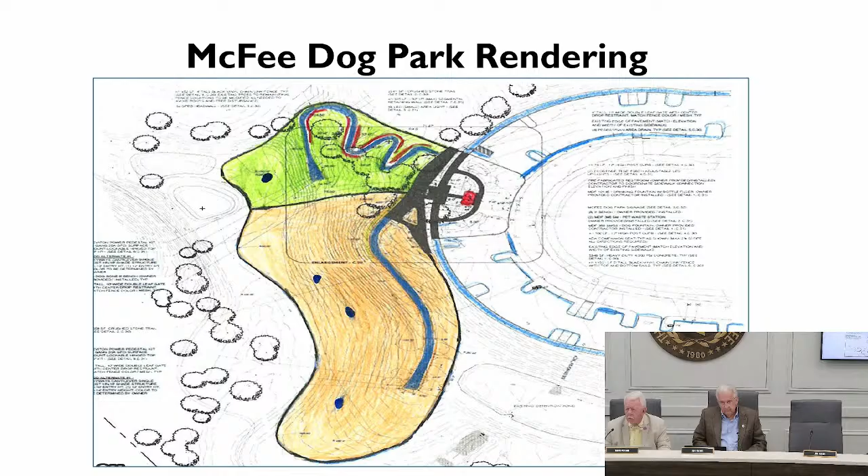This project before you is a long-awaited project. It's the third grant project of four awarded for the town through TDEC's local Park and Recreation Fund. The exact location is the west side of McFee Park, between our newest parking lot area and the adaptive trail. The dog park is relatively simple in design: it's fencing, a little pathway work, and some grass.

As you can see, the park is broken up into a small dog and a large dog park with ADA-rated pathways within each. These paths will be made of an aggregate material described as crushed stone with a hardening material that makes the stone solid. There's quite a bit of hard surface in the plan - the dark area above the blue line is designed as concrete, but it will actually be this aggregate material, which will save a lot of expense.

The reason for the separate parks is to prevent potential conflicts and injuries between dogs. Due to its hilly location, the small dog park has some retaining walls, shown in the red lines above, and a more winding path to meet ADA requirements. The large park has a longer path due to its size, leading to a shade structure and some benches at the bottom.

Coming from the parking lot, we'll have a two-stall restroom facility designed much like the others in the park - that's a separate project later in the fall. As people walk up with their pets, there will be a transition area so the big dogs and small dogs won't mix. Once past the transition, dogs have free rein to wander and play. Each park has fun structures for the dogs, located in the small dog park so those dogs will love that.

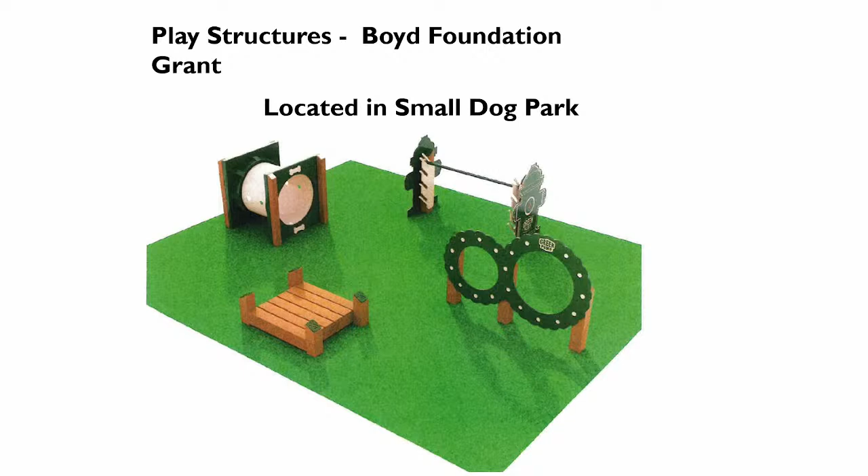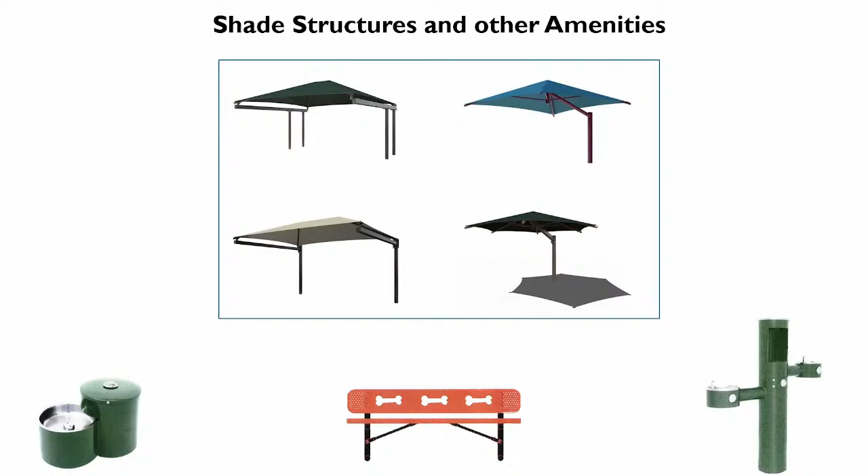A similar structure is located in the large dog park for the bigger dogs. Other amenities include benches, a few shade structures, and both human and pet drinking fountains. The entire dog park property will be surrounded with black chain link fence, for the safety of the animals and people, and to keep everyone safe and separate.

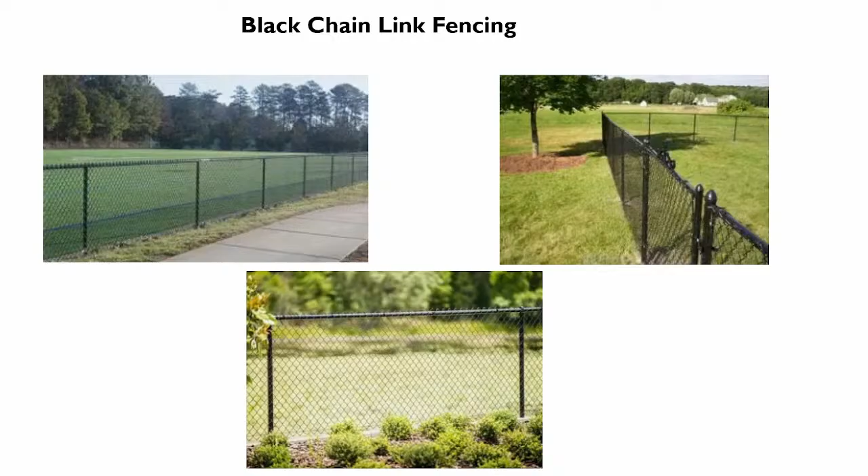Similar to other dog parks, we'll post a dog park code of conduct and other important information at the entrances. This is a non-lighted complex, so evening hours will likely end at early dusk. Our landscape architect estimates this project could take between 4 and 6 months from start to finish due to all the excavation required.

We're planning to go out to bid in early September, perhaps sooner once we hear back from TDEC - they have the plans now and are reviewing them to make sure they are ADA compliant. This puts potential opening of the dog park in late spring, early summer of 2026.

Are there any specific questions regarding the dog park? I have two - first, are the restrooms inside the fenced-in area, or outside? No, they'll be right outside the new parking lot as you enter the area - it's the red area right there, where the little dot is. That'll be the restroom.

And my second question - there's supposed to be a 16-foot by 16-foot shade area at the end of each, the small dog and large dog park? It'll be at the end of the large dog park. The smaller dog park is very shaded, so we don't have a shade structure there - there's already so many trees. Got it, thank you.

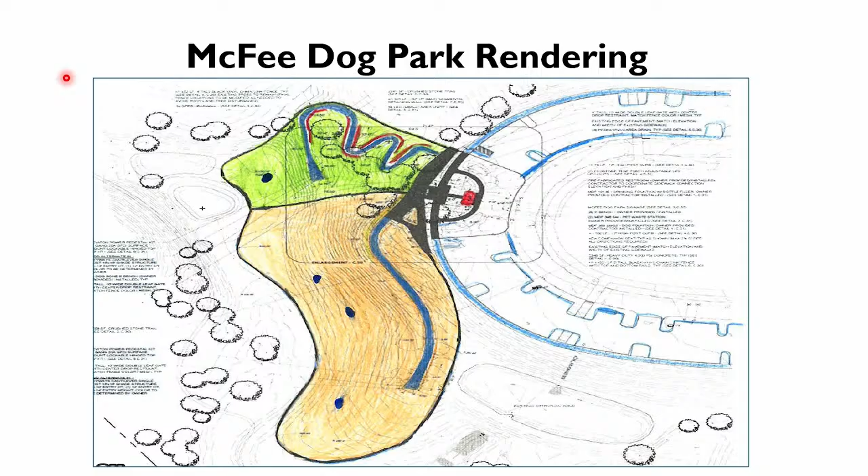I'm going to make a motion to approve as presented.

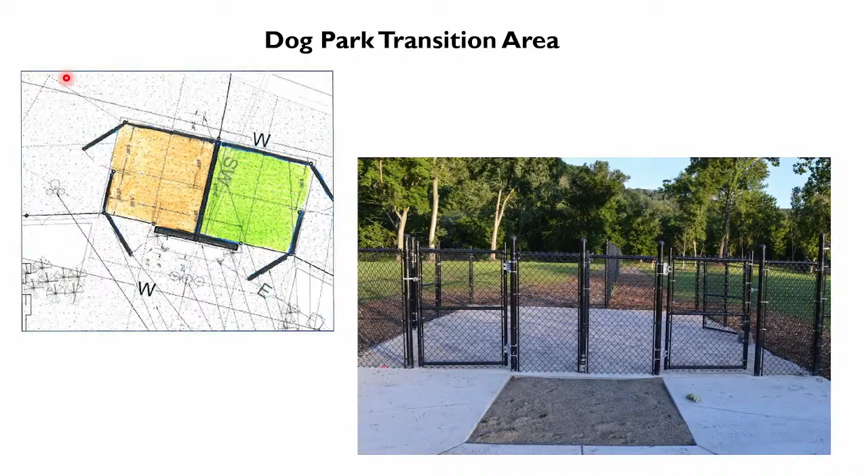All right, motion passes. Do you want to tell us the results? Yeah, the motion passed 6-0. Thank you.

This is the reconstruction of Virtue Road as well as a portion of Boyd Station Road. It begins at a point at the southern end of Virtue Phase 1 improvements that were completed back in 2022. From there, it extends down to Boyd Station Road and then to the west to Willow Cove Way. The project addresses several safety issues we've known about for years, mostly having to do with limited sight distance. It also flattens the curve where Virtue Road ends at Boyd Station.

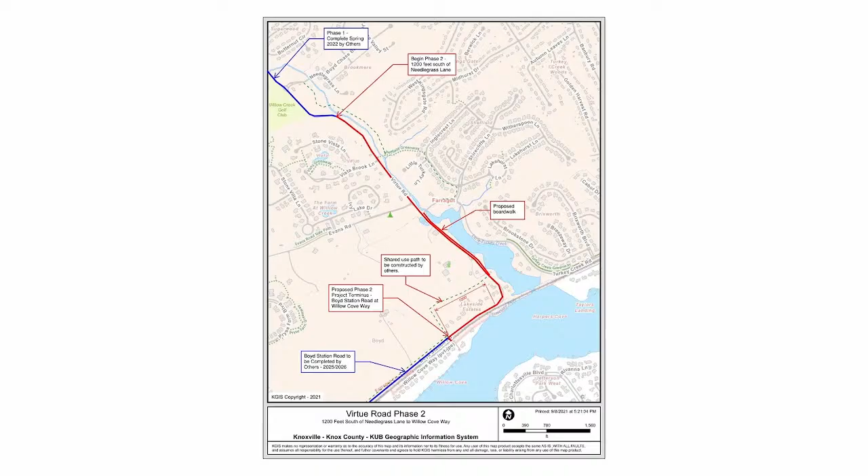One interesting element of this project is about 1,300 feet of boardwalk on the eastern side of Virtue Road, extending from Turkey Creek Road to the south. It will link to a greenway coming out of the Grove at Boyd Station subdivision.

Jason Elliott is with us tonight from LDA Engineering. He's our consultant. If you have any questions, I'm sure he'll be able to answer.

Motion to approve. Second. Any citizens signed up to speak? No, sir.

State your name and your address. Jason Elliott, 2970 Sagegrass Drive, Louisville. And I'm with LDA Engineering. We're doing the design work on this project.

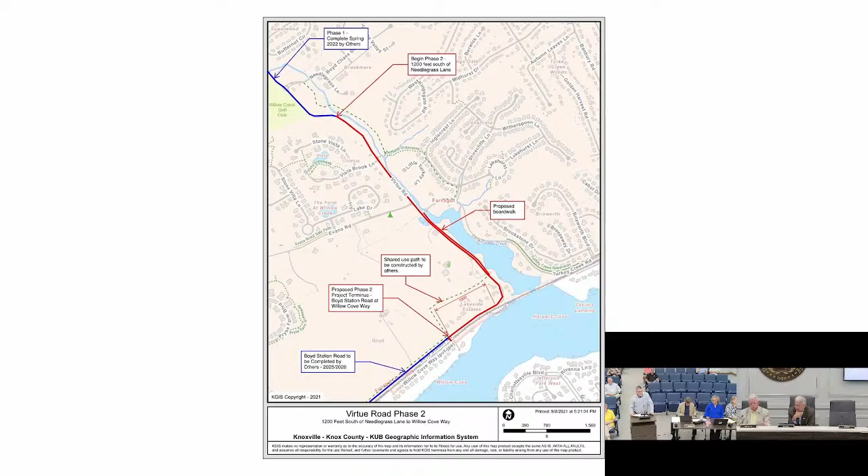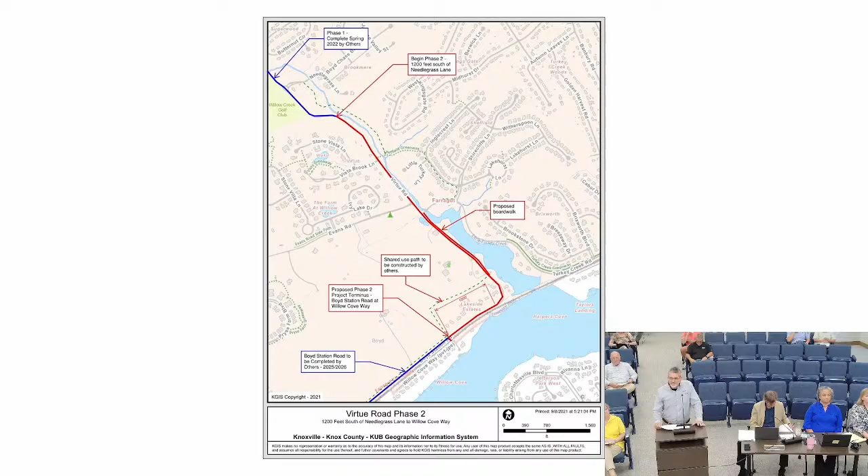Mark, I may ask you to jump around a little bit. Rather than going through the entire set of plans, I'm going to just highlight some examples of where we're improving safety, where we're adding connectivity for peds and bikes, because this area is in a gap of the Farragut Greenway system. So we're attempting to fill that gap to some degree. I just wanted to give you all a few examples of where we're doing that along the project.

I'm also going to talk briefly at the end about traffic calming, which has been brought up by several residents out here. So where was that picture? Can you go back to the photos?

So this is a boardwalk we just finished building in Alcoa. It's not very long and not very tall like the one we're going to have here along Virtue, but it's the same construction. It's all timber except for the stainless steel tension cables which make up the railing. It's really attractive, especially in person. I don't think the photos do it justice, but we've actually done several of these in Blount County, and I think they're a nice addition, a nice aesthetic.

All right, so let's talk about safety a little bit. I'm going to try to limit this to 10 minutes. If I go way too long, let me know. If you go to the first plan sheet, Mark, sheet 4, yeah.

So for improving safety on a roadway corridor, there are several ways to do that. For instance, on this project we are widening the lanes slightly from about existing 10-foot width to 11-foot lanes, which is about what TDOT likes to see, 11-foot minimum. We're adding curb and gutter on both sides of the road. That creates a somewhat physical obstruction to the edge of the road, sort of like rumble strips do on the freeway. If you hit it, you're going to wake up. So those are kind of minor ways to increase safety.

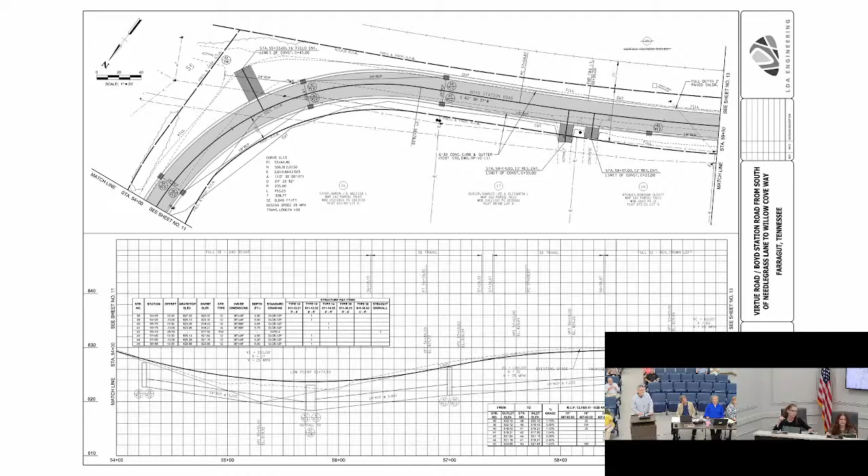And then if you go back up to sheet 10. Jason, before you move on, my concern is we have so much technology going on, it's blowing my mind. The people that live on that corner, the Stouts, their driveway, is their sight distance going to be improved with this? Because my feeling is people will be able to take this turn a little bit faster than they can right now. And so them pulling out of their driveway, they shouldn't have to gun it, so are they going to have enough sight distance to see?

So one thing that'll help is we're chopping that hill down, which is their front yard, basically their lawn. That's going to be cut down some to create a ditch on the edge of the road. So they should be able to see pretty well that way, until it really starts curving.

Now in the other direction to the north, that was more of a vertical issue where there's a hump in the road. So you're not able to see - this is the set of plans that was the latest set that we submitted to TDOT. Since then, we've cut that high point down about 18 inches, and that greatly improved the sight distance for them coming out of their driveway, turning left. So it's not shown here, but it has been addressed.

Now, I don't know if you've spoken to them, I know they've been involved in the process. I assume most of the turns they make out of their driveway are turning left. That's what they told me at the public meeting. Okay, yes.

When we get these plans to a final stage, we can send them so you could see that change. All right, Mark, if you'll go back up to, should just be one more sheet, I think.

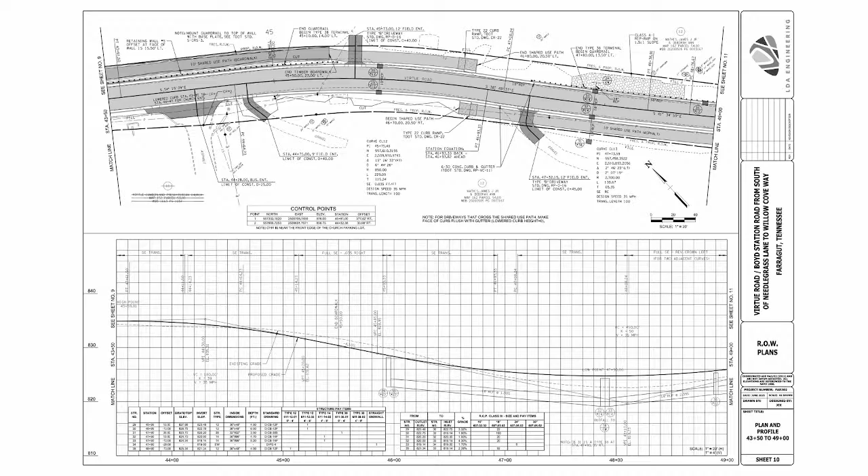There is one other vertical adjustment that I want to show you, and that's just north of Evans Road. So you'll need to go to sheet 7 for that one. Okay, station 28 to 29, to the left a little, Mark. So we've been made aware that turning left out of Evans onto northbound Virtue, you cannot see, again, because of a hump in the road.

What we're going to do with that hump, we're going to cut it down about 2 feet, just like the other one, and that's shown in the profile window. And that's going to increase the sight distance there about 200 feet. So that should not be a problem anymore.

We're also cutting back some of the vegetation on that corner adjacent to the Slayton property. So that's going to open up that whole intersection, and it should be a lot better situation than what's there now for vehicles turning left out of Evans.

Suggestion, if you say cut back, that's something that constantly needs to be trimmed as it stands right now. So I hope that there's more than just cutting it back, I hope it's pulling it up. They'll be gone, okay, thank you. Yes, sir, because we're having to cut a slope back, so we'll have to clear all those trees before we do that.

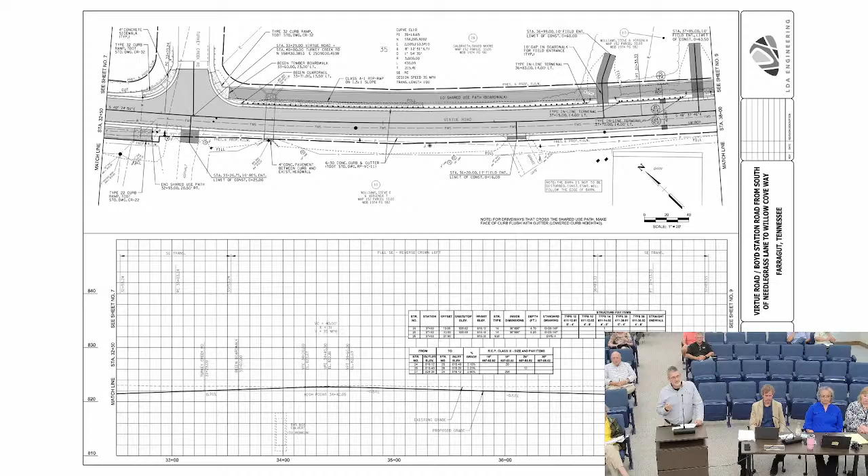The next part I wanted to cover was the greenway portion and how bikes and pedestrians will be able to use this corridor now, because currently there's really nowhere for them to be on this road.

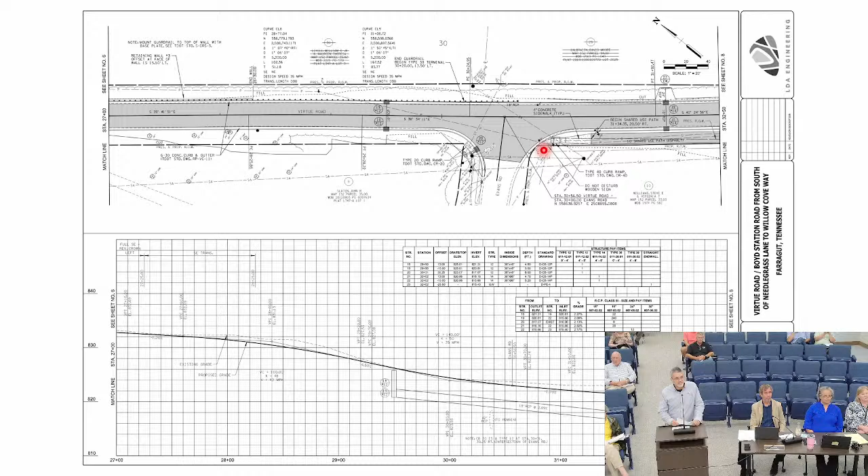I'm sure everybody knows about it. If you go back up one more, sheet 7. The greenway is going to start right there. It's going to tie into the existing sidewalk along Evans. There will be a crosswalk that goes across Evans at the stop sign.

In this area, we're using conventional concrete sidewalk at the intersection, and also just a regular asphalt greenway on the west side of Virtue. That's the shaded area you see below the road.

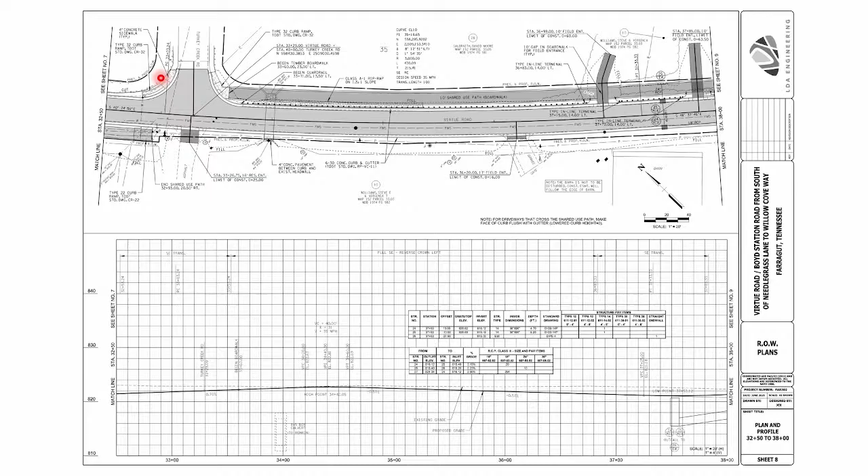You can jump to the next one. So it stays on that west side, stays asphalt until we get to Turkey Creek Road. We cross over on the north side of Turkey Creek, which, by the way, is going to be a three-way stop now, so that will not be considered a mid-block crossing. There will be a stop condition for all directions, which is more desirable when you're crossing pedestrians and bicycles.

Is that intersection meeting those warrants, seeing enough traffic especially from Turkey Creek Road, that they're not going to be blowing off the stop sign on Virtue Road? That's correct. That was one thing we were concerned about, that there wouldn't be enough volume coming off of Turkey Creek Road, but there was. We did meet the warrant for having a three-way stop there.

Well, you're going to have the road closed, so people won't be there until it's open again, correct? Do you mean during construction? Yes. The traffic control plan will have lane closures during construction, but we won't completely close the road unless something changes between now and when we start construction. We have a plan in place now where traffic will be allowed to stay on Virtue in one direction only.

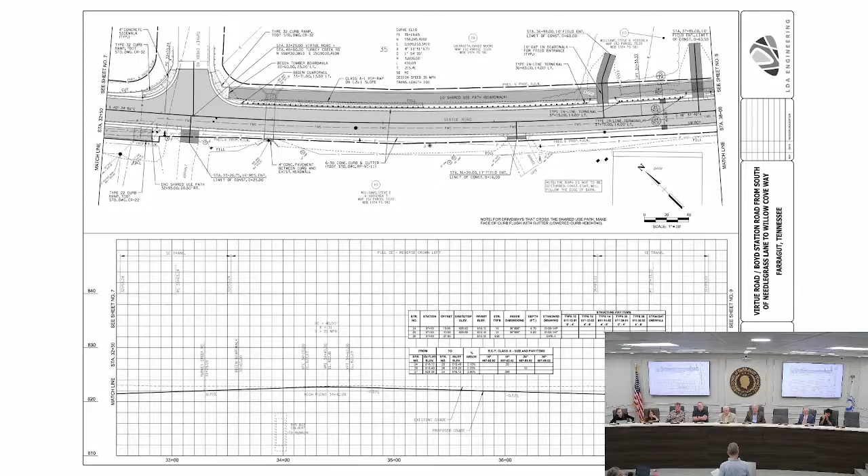Can I ask you, would it be wise, when you start construction and you start with all these lane closures, to at that point put in the three-way stop? Just so people—they're already slowing down, it's already confusing—putting in the three-way stop while everyone's getting used to that at the same time they're slowing down because of construction gives you the process of re-triggering everybody and realizing they need to know this is going to be a three-way stop and how it's going to work.

Yes, and that's exactly how it will happen. There are 3 phases of construction right now, the way we have it planned. This intersection is in phase 2, so we're going to start on the north end and make our way south, and Boyd Station will be the 3rd phase. So yes, while there are lane closures, that's when the signing and pavement marking will go in for the three-way stop. And I know I'm way past 10 minutes.

You're good. Okay, so the point I was making was the crossing there will be at a stop condition, and then the greenway picks up again, but this is where the boardwalk starts.

The reason we did a boardwalk was because the creek is right there. To do a fill section, we would have been impacting the vegetated zone along the creek—it would have been an environmental nightmare. So instead we're doing a timber boardwalk with posts anywhere between 8 and 25 feet, depending on what's happening, which minimizes the impact to that buffer area along the creek. It is more expensive, but it's definitely the best way to go, and it'll be the best end product for the users.

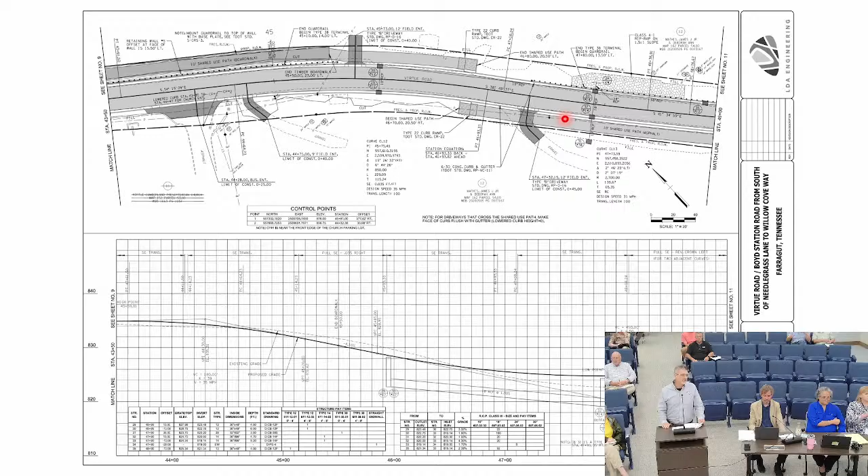Then it becomes an asphalt greenway again on the west side, and that will tie in—if you go one or two more—right there, to where the developer for the Grove is building a greenway parallel to Boyd Station Road, and that's where we're going to tie in to that greenway.

What about the flag lot portion, or the flagpole portion, coming from the Grove down to Virtue where the crossing's at? That's where they're building their greenway, on that flag lot portion. You can see it there—the property lines are only, I don't know, 50 feet apart, maybe 30 or 40. So as far as I know, that's all that's going on in that flag lot area.

I just wanted it on record for people on TV watching to know what we're talking about, okay? Okay.

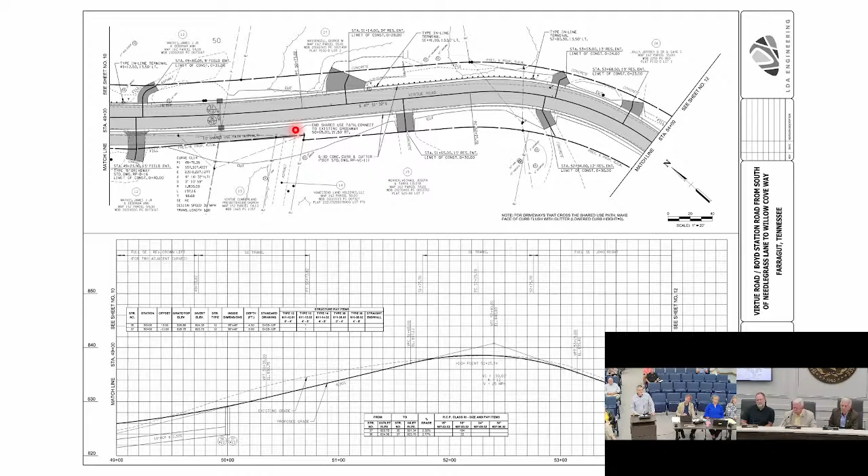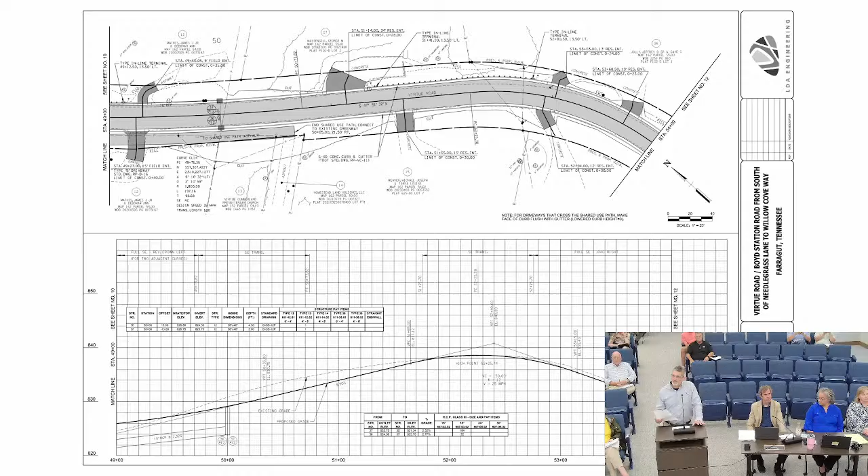All right, so that's the end of the Greenway discussion. The only other thing I wanted to touch on was traffic calming. Even in Phase 1, Virtue Road, speeding was something we heard over and over again. How do we get them to slow down out here? So on Phase 1, we did that roundabout at Needlegrass Lane.

On this one, we're doing probably the most effective traffic calming you can do, and that's making them stop halfway down. I don't think you can get any better than that. This roadway is classified not as an arterial, but a major collector, so you're very limited on the types of traffic calming you can use.

You can't use speed humps, you can't use little traffic islands in the middle like we did on... Grigsby Chapel, that's it. So there's roundabouts, there's stop conditions. We figured the intersection warranted a stop, so that would be a good way to slow people down right about halfway between Boyd Station and the northern end of this project.

So I think that worked. People will probably, at the crosswalk, naturally slow down looking to make sure nobody's there. I think that's going to be a speed deterrent as well. I hope so, because there will be signing for that crosswalk too. Even though it's not a mid-block, there will still be advanced signing.

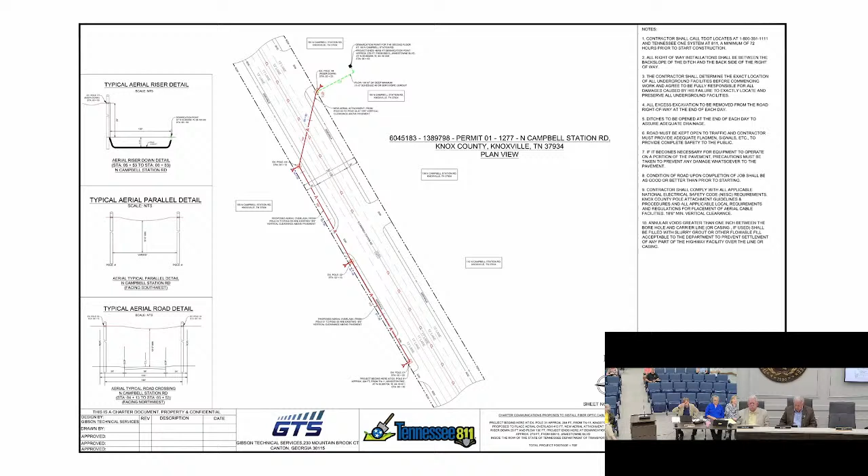The staff recommends approval of this fiber optic cable extension, subject to obtaining a right-of-way permit through the engineering department and coordinating the actual service connection with the property owner. Motion to approve the plan to extend the fiber optic cable subject to those conditions. Second. All right, do we have any citizens signed up to speak? No, sir. Do we have a representative present?

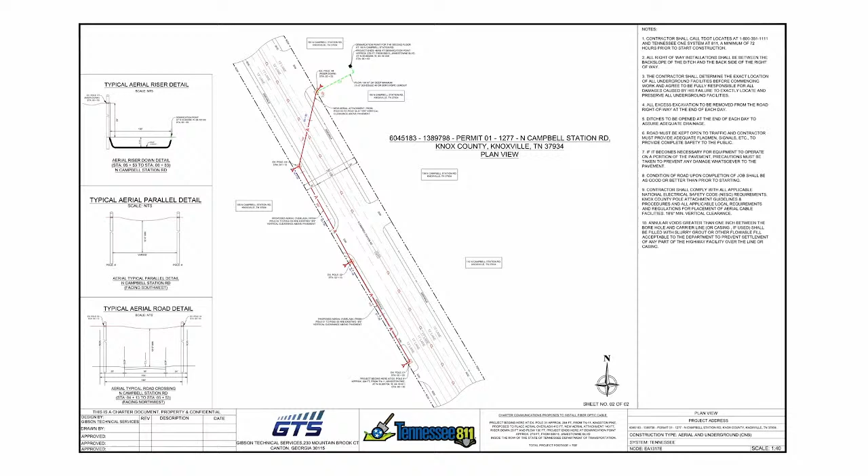Do commissioners have any questions or comments we may want to address with Mark?

Maybe it may take Darrell to answer this one. But as that crosses at that angle over, is that also going to be... are we going to be putting a mast arm for a traffic signal on that other side? Is that correct? That's further north. You're talking about at Jamestown? Yeah, that's further north. I don't know that it shows up here, but it does. I mean, do we already have something on that side of the road already? Is what I'm asking.

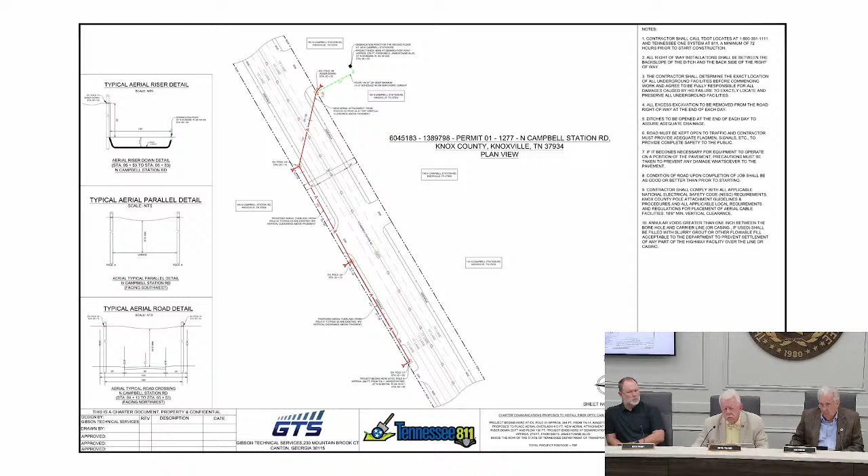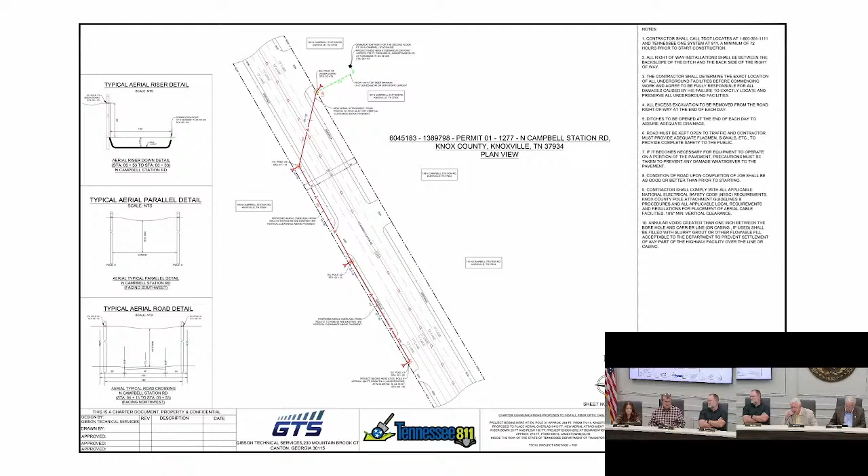Where the mast arm will go, the only thing I can think of is the school zone sign on that side. I can't think of any conflicts, and even with the future signal, I don't think there'll be any unless we have some sort of warning light, which I don't think we would have. Or if we have one of the flashing approach lights for the signal, but I don't think we normally would do that when we have signals so close together. Well, it's not going to be charter anyway, now that I think of it, because that will be ours for the traffic signal.

Are you talking about our underground? Yeah, that's our stuff. Okay, never mind. It is underground in that area. Okay, it is? Okay.

What's on the plan does show an aerial crossing diagonally, but I think that's kind of where the mayor was starting, is hey, let's just make sure we don't create a future conflict with the new signal there. So maybe just take a little closer look at it. We should be okay. I mean, it's further back this way, but anyway, okay.

All right, we have a motion and a second. All in favor, say yes. Yes. Opposed, no. Okay, the motion passed 7-0.

All right, thank you Mark. Next item on the agenda is item 4D. Request for approval to extend fiber optic cable for Comcast along a portion of the overhead utility line system on the west side of Concord Road, south of Kingston Pike, and then crossing Concord Road to service 116 Concord Road. Comcast is the applicant.

This project also is mostly an aerial project. They're following an existing distribution line from south of Kingston Pike along the west side of Concord Road, then crossing over with the aerial line to service the medical complex at 116 Concord.

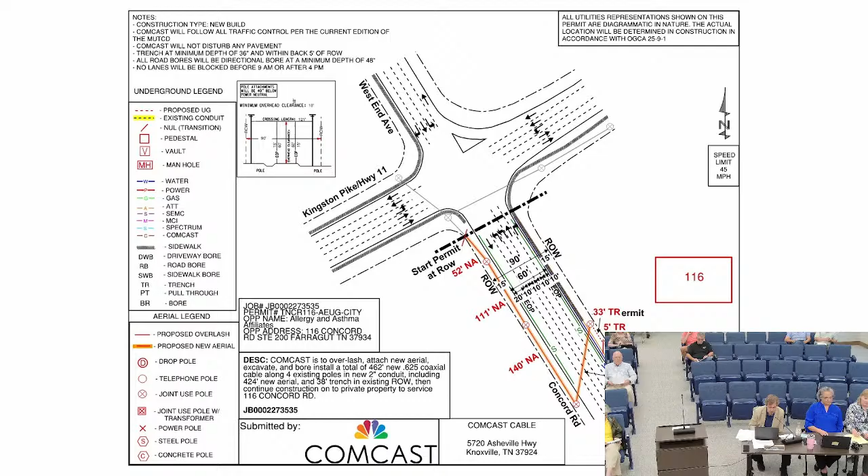Originally they had open trench installation through about a 38-foot section on the east side of Concord Road. They've changed that to directional boring now, so we have no open trench installation, and that was one of the initial staff comments on the project. With that modification to their plan, the staff recommends approval of this fiber extension project subject to obtaining a right-of-way permit through our engineering department.

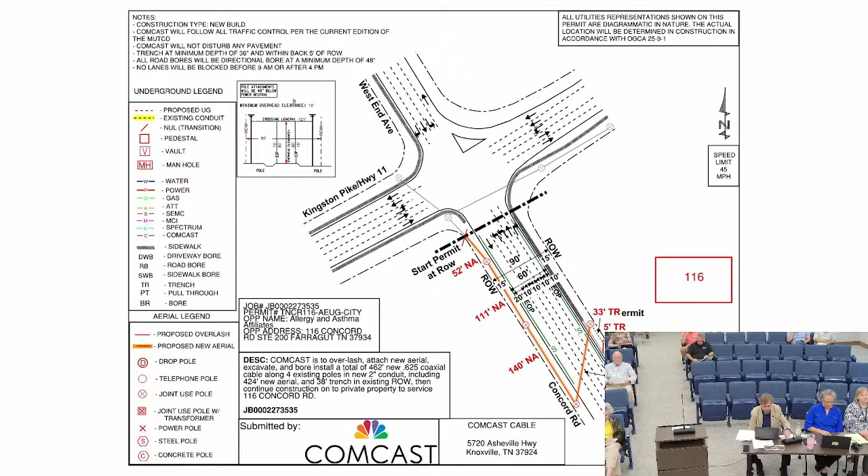Move to approve. Second. Any citizens signed up? No, sir. Okay, do we have a representative? You want to step up to the podium, please? State your name and your address, please.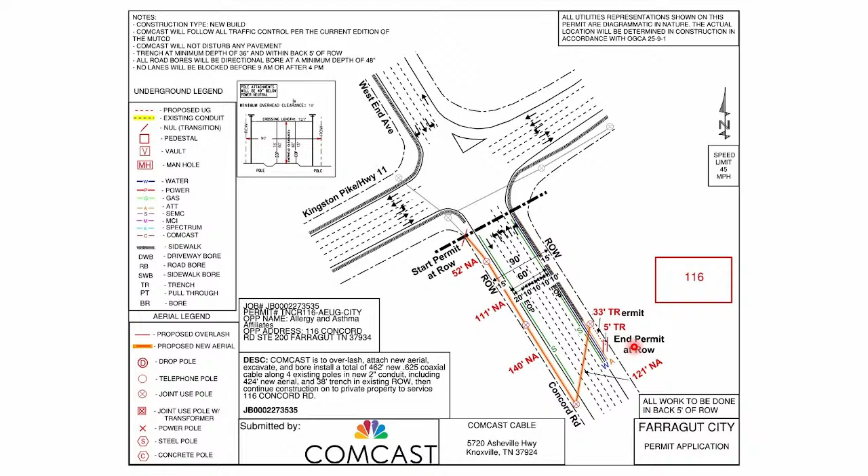Joshua Jones, 4718 Springbrook Road, Knoxville, Tennessee. Have you got anything you want to add to what Mark already presented? That's pretty straightforward. Okay, any questions from the commissioners? No questions, no comments? Thank you.

All right, we have a motion and a second. Everybody in favor say yes. Yes. Opposed, no. Motion passed 7-0. Okay.

All right, next item is item 4E. Request for approval for a water line relocation associated with improvements to Boyd Station Road, including the roundabout at the access to the Grove at Boyd Station subdivision.

FUD is the applicant. This project basically involves retiring an existing water line that's closer to Boyd Station Road, and installing a new 12-inch water line that would be further away from Boyd Station Road to avoid conflicts with the widening we're going to be doing to Boyd Station Road and the multi-use trail that's going to be constructed along the Boyd Station Road frontage. This also involves crossing of McFee Road, and there'll be a partial closure of McFee Road. There was a traffic plan on the screen there.

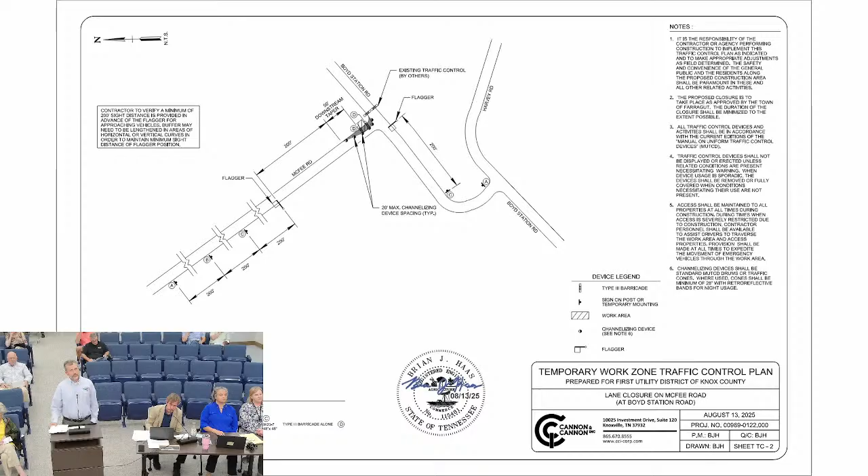They will be installing a 24-inch steel casing across McFee Road on the westernmost part of this project. The rest of the project is basically just moving the water line further away from Boyd Station Road, more north to get out of potential conflict with the project the town and a developer are working on with Boyd Station Road improvements. Staff recommends approval of this utility project subject to obtaining the right-of-way permit, including coordinating erosion and traffic control.

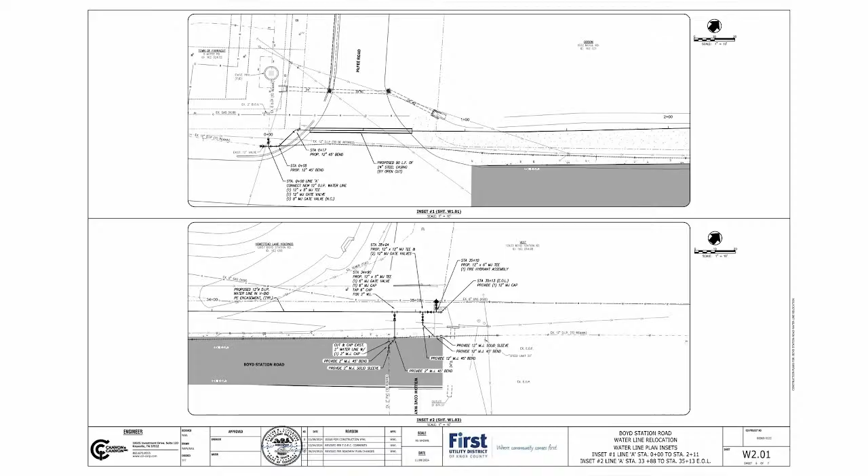So if you move, have to approve. Okay, thank you. Second. We have a motion and a second. Do we have any citizens signed up?

No, sir. Okay, we have a representative. Would you give us your name and address, please? Edwin Deaton, 122 Durwood Road, Knoxville, Tennessee.

Anything you want to add to what we just heard from Mark? Very little, it's a pretty easy one to talk about. The town and the developer are participating in a road widening project. They're widening the road, changing the storm drains, adding a greenway. So with that, our water line is in conflict, being under the road with storm pipes going through it. So it's something we're moving.

It's a 12-inch today, it's going to be a 12-inch tomorrow. We just can't be in conflict with the work, so we're backing up to where we're not. Is that close to the right-of-way, to the road? In the right-of-way, it's at the greenway - say, 15 feet off the edge of pavement. So it'll be a safer place for us to go work on it in the future if we have to.

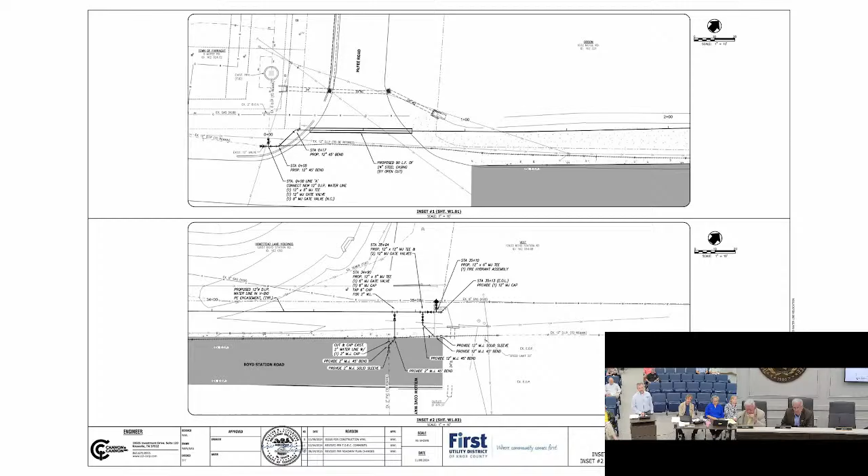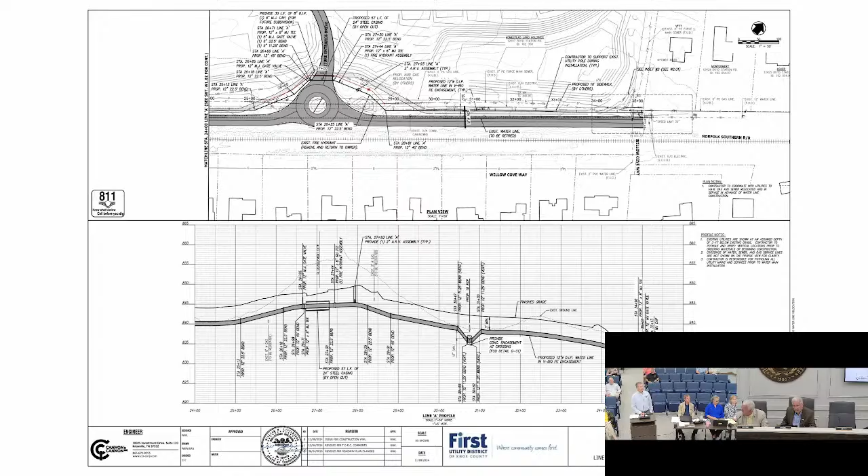Any other questions or comments? Just quickly, I assume you're trying to coordinate this with the construction we're doing now? Yeah, absolutely. One of the things we've worked with the developer and their contractors on - they've been helping get the project corridor to rough grade. I'd hate for us to go in on a green field and put a line in that gets cut out in the high spots and is 10 feet deep in the low spots. So they're getting the project to rough grade where we can come in and put the line in. We're going to take advantage of the road closure in that area so we don't have traffic adjacent to where we're working or making connections. So the traffic control plan we've presented is pretty much worst case - I'm hopeful it'll go easier as they get Boyd Station back open. So we're coordinating that with the developer and their contractor. Yeah, it'd be bad to have both of them closed. Sure would.

Any other questions, comments? All right, we have a motion and a second. All in favor, say yes. Yes, yes. Opposed? No? Motion passed, 7-0.

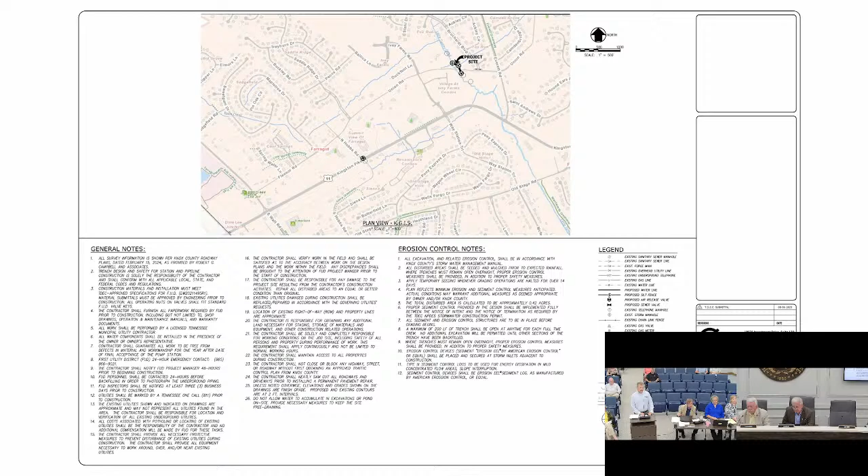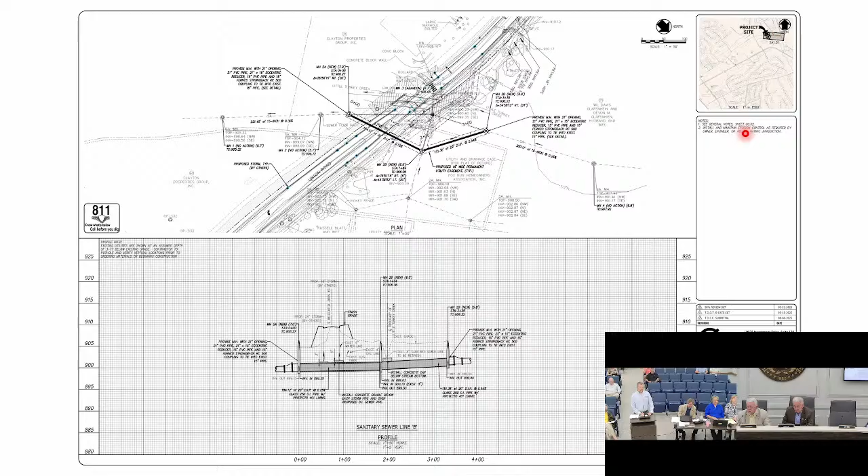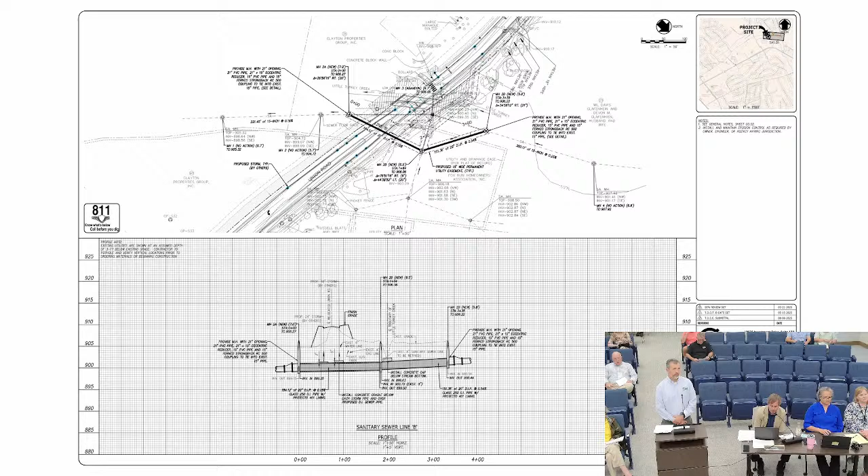Associated with the Union Road Improvement Project, FUD applicant. This project is also an effort by First Utility District to coordinate with another road improvement project, this one on Union Road. It was a little misleading in the plan set in the packet, but really the only area being affected at this time is just the area around the bridge, and they're relocating their existing sanitary sewer line and would have to plat a new easement for this new line, to coordinate around the future bridge construction associated with Union Road. They'll have other coordination along the Union Road corridor as that project proceeds, but as far as the action being taken at this time, what's on the screen is what's being requested - for coordination with the bridge construction related to the Union Road Improvement Project.

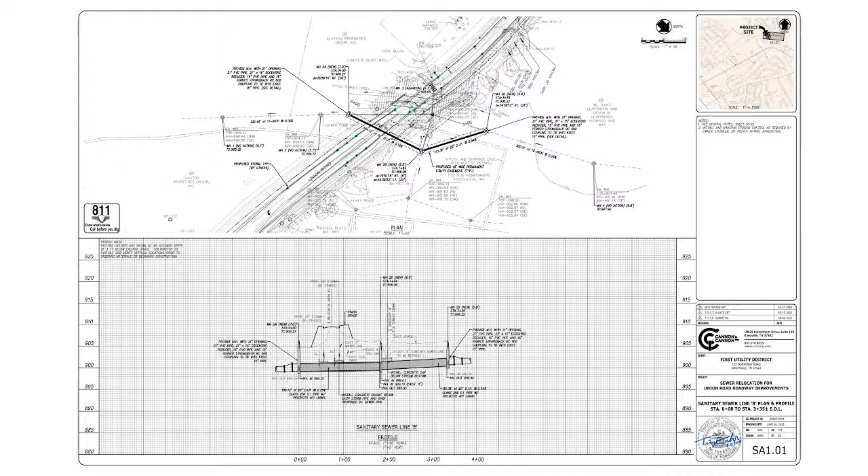At this time, I'd like to call on Commissioner Green. Excuse me, yeah, I'd like to reword the proposed motion in here a little bit. The packet - turn your mic on - I'd like to reword the proposed motion a little bit. The packet that was included had drawings with two projects: one for this 20-inch line, and the other actually for a 2 or 3-inch line. They're two separate areas and two separate scopes of work. So I wanted to word this motion to make it clear what we were approving, so it wouldn't get confused for the record.

So my motion is: motion to approve the installation of 335 feet of 20-inch iron pipe sewer line to replace and relocate the existing line, which will be abandoned in place. The approval is subject to obtaining a right-of-way permit through the town engineering department, which will include erosion and traffic control, and platting a new sanitary sewer line easement. That way it's clear. I'm going to second that well-crafted motion. Edward, do you have any issues with that?

No, sir. Okay, any other questions or comments from the board? I think it's well covered. All righty, so we have a motion and a second. All in favor of the motion, say yes. Yes. Opposed, no. Okay, motion passed, 7-0. Thank you.

All right, next item, 4G. Discussion and public hearing on approval of a site plan for a children's wing addition at the Concord United Methodist Church, located at 11020 Roane Drive, zoned general single-family residential, R2, Cannon applicant.

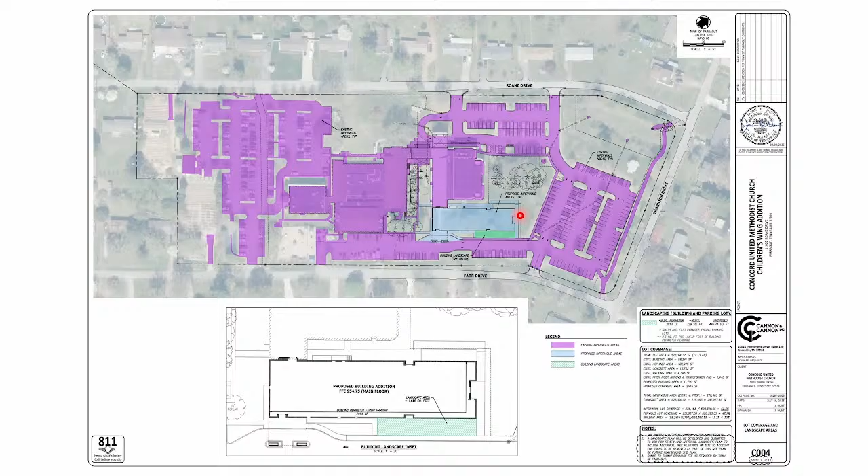So it's basically just an infill of a pre-planned location for this particular addition. So staff is recommending approval of this plan, subject to the seals being properly signed and sealed. There's a drainage fee that's required. A landscape plan will need to be submitted, as there are some trees being taken out as a result of this project. And then First Utility District signing off on the water and sewer plan sheets. With those subject-tos, again, we recommend approval.

Motion to approve a site plan for the children's wing at Concord United Methodist Church, with the subject-tos. Second.

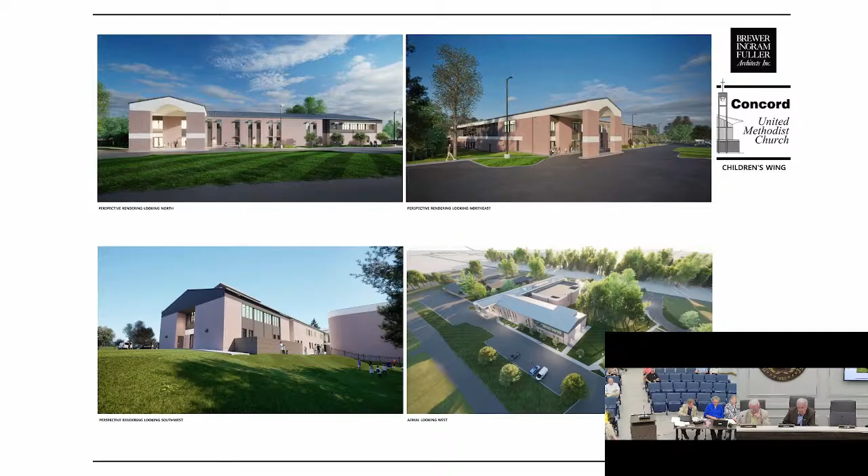All right, do we have any citizens signed up? No, sir. Do we have any representatives from Cannon? Hi, I'm Jason Hunt with Cannon & Cannon, 10025 Investment Drive, Knoxville, Tennessee. The only thing I really wanted to add was the purpose of this building is to support the existing congregation, so it's not really adding any additional traffic volume. That's why we're also not adding any additional parking spaces.

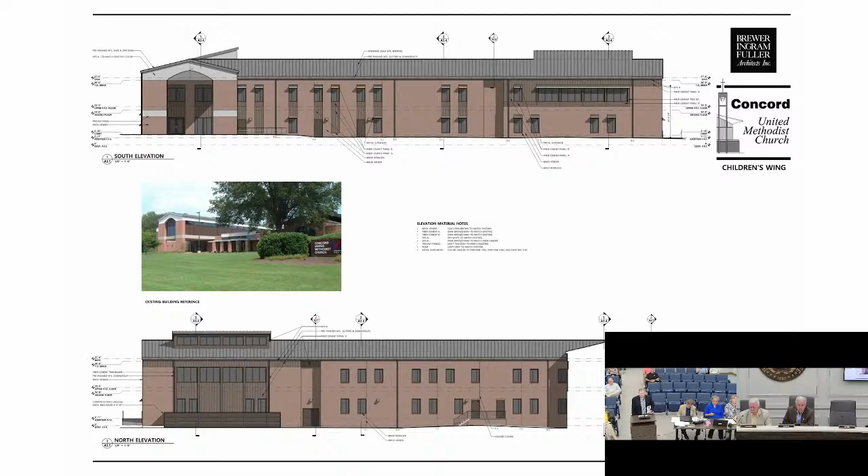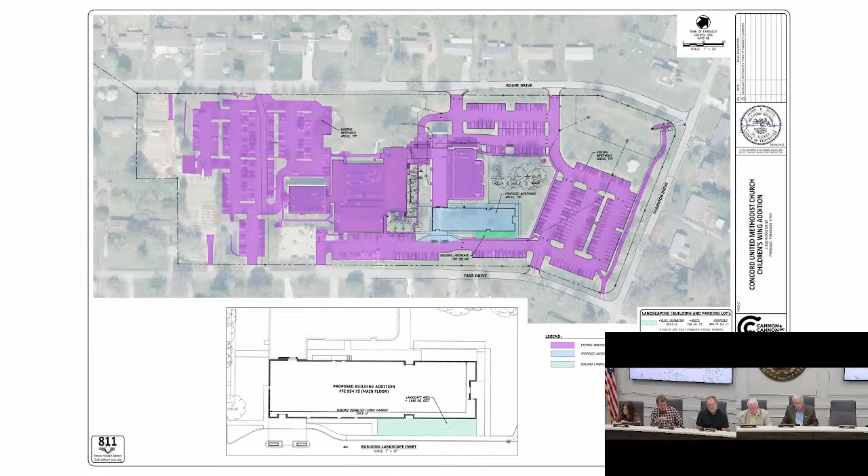Thank you. Any questions or comments from the commissioners? I assume you guys have already met with the fire marshal and talked about, I can't remember if this building's sprinkled or not. But if it's not, that's probably gonna be something that's triggered upon this expansion. So if you guys already have that and got the fire flows there and so forth, I assume if you're at this type of detail, you've already passed those obstacles, but I just wanted to make sure those are definitely some things y'all are gonna want to check off.

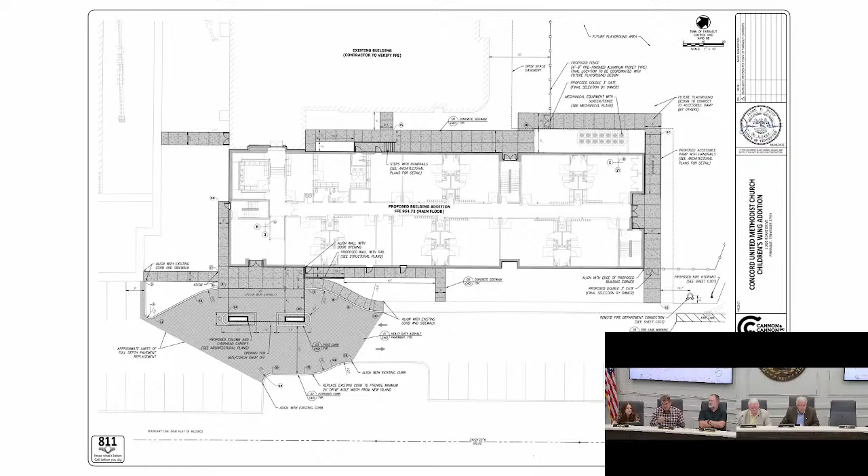Yeah, and we've had previous meetings on this project, and there'll also be a full building package that'll go through as well. So the existing building, is it in fact already sprinkled? Yes. Okay, well, that's gonna make it a heck of a lot easier. If you had an unprotected building and then tried to do this, it might be challenging. Not impossible, just expensive. Thank you.

Okay, no further comments or questions. We have a motion and a second. All in favor, say yes. Yes. Opposed, no. Motion passed, 7-0.

Next item, 4H, discussion and public hearing on approval of a site plan for Horizon Plaza Phase 2, located at 11011 Kingston Pike, Zone General Commercial, C1, and Floodplain District, FPD, Urban Engineering applicant.

Yes, this is the second phase of this building. It's at the northeast intersection of Admiral Road and Kingston Pike. The first building was approved back in 2021. It's about a 12,000 square foot building that's under construction, as you've probably seen. Most of the parking lot was part of that phase 1 up to about this point here. So all this to the east is part of phase 2.

This particular site plan is involving the remainder of the property, phase 2, and we have this building located here just to the east of the existing building, and the additional parking here to the south of the building and to the east of the building to support that addition.

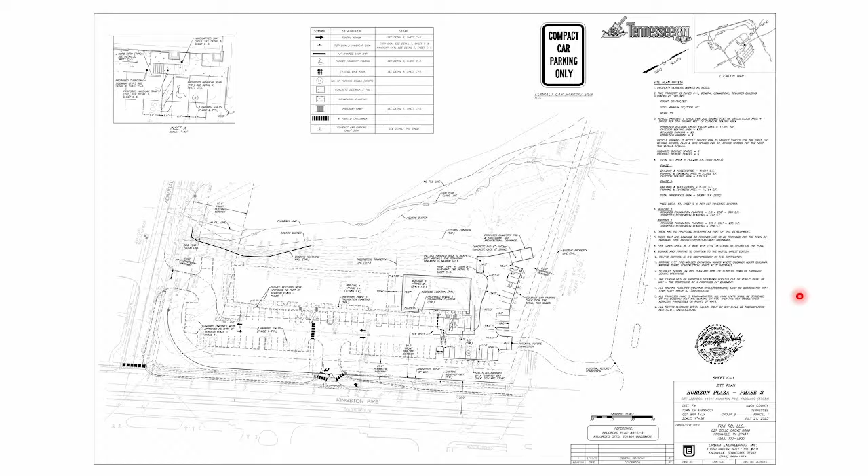The remaining comments we had were, again, the First Utility District approving the water and sewer plans. That's something we've been requiring, you probably see that as a common subject too. It's pretty important because we've had projects in the distant past where there was a lack of communication and it created some real problems. So we definitely want to make sure they look at those and bless the sheets before we have a final approved set.

They also need to address the masonry percentages. They've got 65% masonry and it needs to be 75%, so they're going to have to modify that slightly. The building will match the existing building to the east, but again, the masonry percentages are required to be 75% on the net facade of the entire building. So that's the second thing.

Double checking the roof-mounted HVAC units, because we ran into an issue with the building that's under construction, and they're going to have to come back and retrofit that HVAC screen to make it so it's not visible from Admiral Road in particular.

So that's another one. They have updated the cross-lot access. That was another initial comment, but that's no longer a comment. The seals, making sure those are correct.

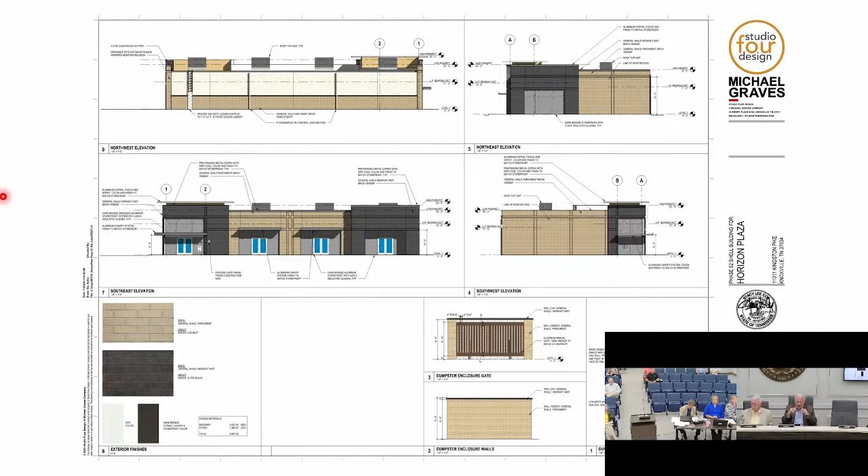And then finally, completing the stormwater maintenance agreement for the entire development. That's a requirement now for new construction, and this development is new enough that it's not grandfathered in like the Concord Methodist, where that detention basin's been there for many years. This one's obviously still under construction.

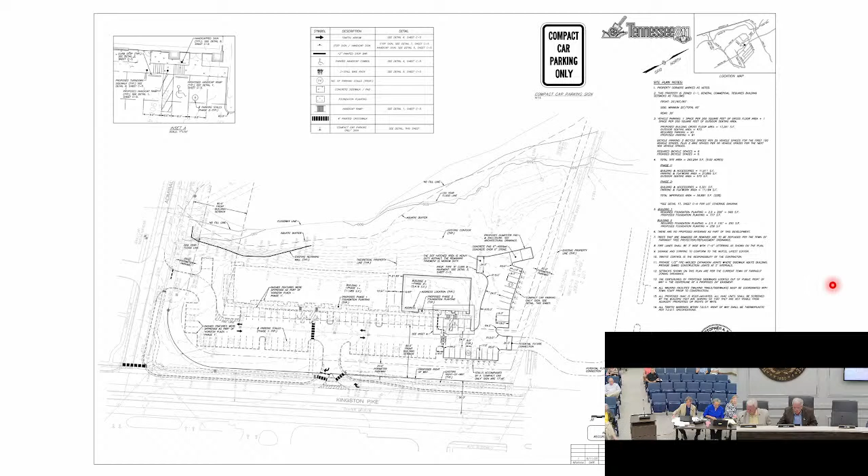So with those subject-to's, again, staff recommends approval of the site plan. Move to approve with the subject-to's. Second. All right, we have a motion and a second.

Are there any citizens signed up? No, sir. Do we have a representative present?

Yeah, I'm Brad Sharp with Urban Engineering, 10330 Hardin Valley Road, suite number 201. I don't have anything to add, but I'm here to answer any questions you might have.

Terrific. Any questions from the commissioners? None. The only question I would have is whether you're comfortable with the subject-to's listed there, especially the percentages on this? Yes, sir. You're good with all? Do what you gotta do. Okay, thank you. Like that attitude.

All right, we have a motion and a second. All in favor of the motion, say yes. Yes. Yes. Opposed? No? Motion passed 7-0.

Moving on, item 4I. Discussion and public hearing on approval of a site plan for 4 commercial buildings associated with the Kingston Pike Village Phase 2 Planned Commercial Development, located at 13104-13124 Kingston Pike, zoned Planned Commercial Development, PCD. Kingston Pike Properties, applicant.

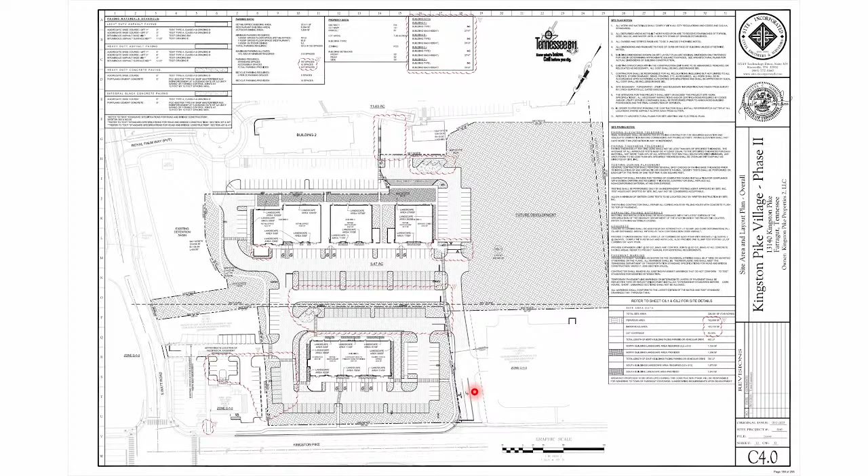So the remaining subject-to's on this site plan were the traffic impact study—again, we'll have to coordinate that with TDOT, whatever the findings are—the water and sewer plans, as I mentioned on the other projects, being approved by First Utility District, and making sure the professional seals are properly signed and dated. The reason I bring that up: the town, when we had an audit from the state, one of their findings was that some engineers and architects weren't properly signing and dating their seals, so we've been checking that so we don't get dinged on it again. It's an easy fix. The landscape plan is going to the VRB next week, and then just obtaining the grading permit and coordinating that work with Little Joe's Pizza as part of this larger project. So with those subject-to's, the staff recommends approval.

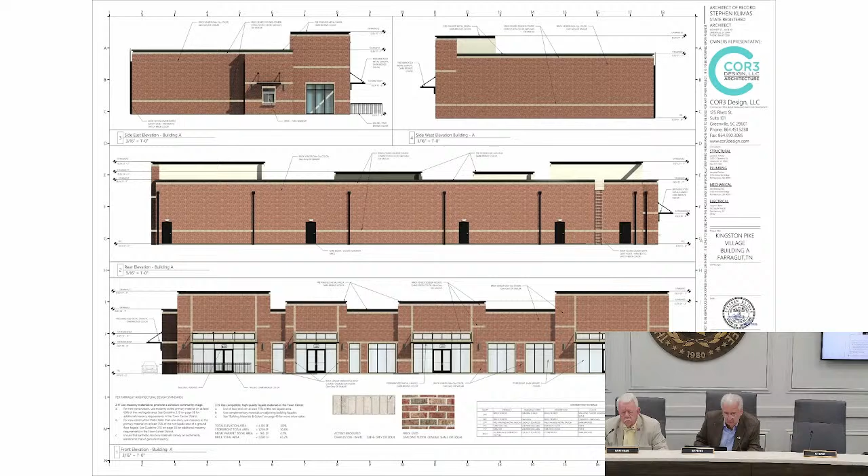Motion to approve. Second. We have a motion and a second. Any citizens signed up? No, sir. Do we have a representative? Annette Hummel, Site Incorporated, 10215 Technology Drive, 37932.

We're good with all the subject-to's, and I don't have anything else to say unless you have questions.

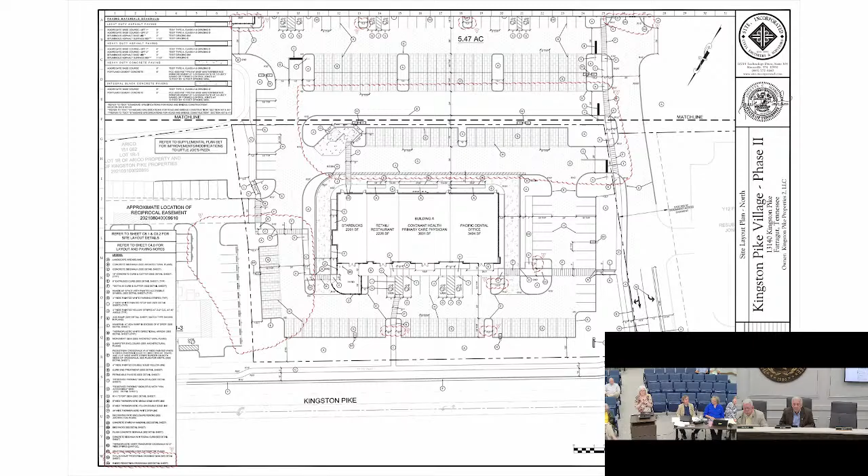I have a question regarding the traffic impact study. You have some buildings here that are loosely designated retail, or restaurant, or retail office. When you put together a traffic impact study, if that's a potential restaurant, are you using that maximum number as your traffic generation number? How do you guys plan for that? We don't do the traffic studies ourselves, so I can't answer that question. Daryl, is that what they would do? I think so, yes—they would take what they intend to be, potentially the maximum use. Correct. Okay, thank you.

All right, if there's no further questions, we have a motion and a second. All in favor, say yes. Yes. Opposed? No. Okay, motion passed 7-0.

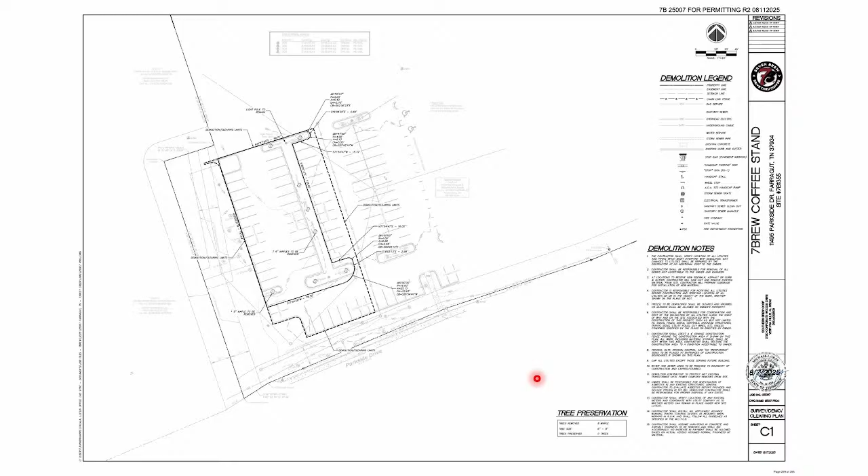So they're basically demoing this part of the parking lot, which I think takes out 33 parking spaces. They've looked at this—they can give you a count—but staff's not concerned about the parking because there's a lot of parking out there. Basically, they're going to redevelop that part and have three lanes with a little over 500 square foot, 7 Brew Coffee, drive-through business.

The two inner lanes are really the customer lanes for the most part. The outer lane could be a customer lane in busy times, but it's mostly going to be a bypass lane. And then they're reconfiguring the parking spaces along Parkside Drive.

There's actually going to be more landscape area after this project than there is out there currently. So they have less impervious surface than what's out there now, because all of this is going to be landscaped area.

The building itself is going to be mostly brick. I don't think that's normally what they would do, but that's what they are proposing to do here. And this is kind of a non-color rendering, and this is the color rendering.

A couple of things to look at and talk about—we discussed these a bit at the staff developer meeting on August 5th. The applicant is here, and they have a color rendering of what the color actually looks like. But as proposed, the roof is kind of a blue.

In our color palette, it doesn't really address roof colors. If you go to the architectural design standards, they do have guidance there, which talks about compatibility with the surrounding context and trying to encourage using earth tones or muted colors. So those are things to think about here.

But the accent color on the canopy, the shade of blue that they're using, is pretty similar to one of the blues that's in our adopted color palette, because it's pretty broad. But that's one thing for discussion—the color.

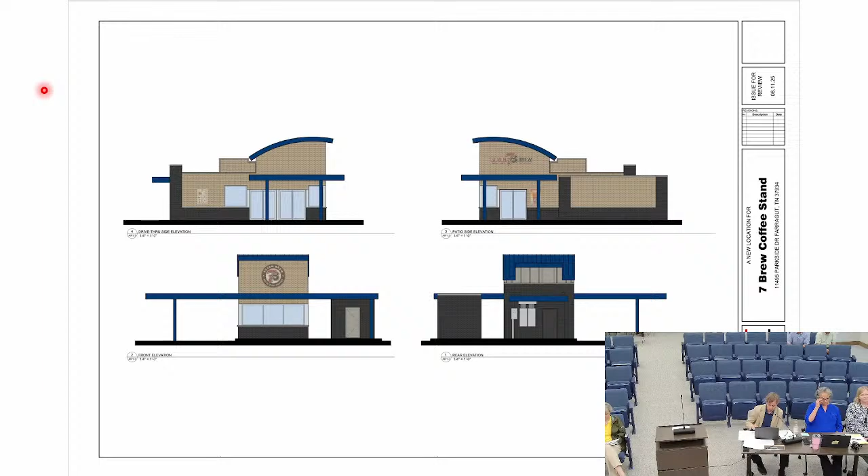There are some pictures of actual buildings in other locations and what that looks like, keeping in mind our building is going to be mostly brick. But the color, I think, is pretty similar to what you're going to see on these slides.

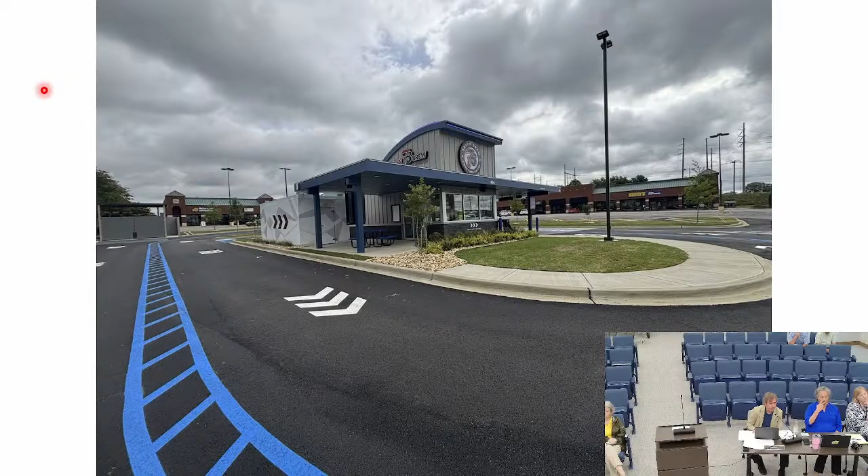Again, it's a nice reuse of an area that's not really being used. I think a lot of the properties along Parkside Drive are frankly overparked, and they probably could do this in other places—like JCPenney comes to mind, for example. So I think it's a good idea.

I think some of the questions for you all are the color of the roof in particular, in comparison to the guidance that we have in our architectural design standards—that's something to think about.

The single band of neon—we have that on other projects in the town. There are a number of buildings that do have that. It's not a sign, it's not blinking, so staff's comfortable with that.

As far as the remaining subject items, in addition to just the Planning Commission's recommendation on the colors, is to make sure that the final site plan set includes all of the information in one set, so that the building elevations, the exterior site lighting, and civil sheets are all submitted together.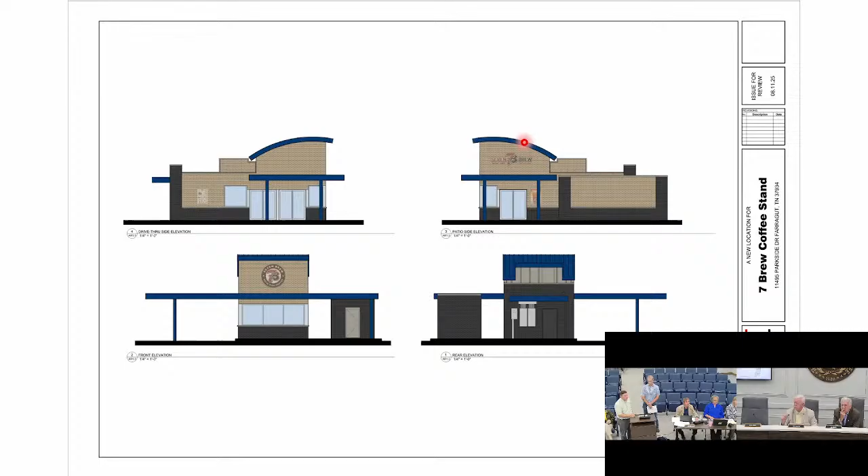I'm Mike Gray with Southern Brew Corp, we're the Seven Brew franchisee, at 3750 Corporate Woods Drive, Birmingham, Alabama, 35242. We're also the civil engineers for the project, internal civil. So we agreed to the subject-tos, and I'm here for any questions you may have.

As Mark said, this is kind of a unique project for this area because I think it'd be one of the first infills, but that's perfect for our brand - we're such a small footprint and we're taking advantage of that. I do have the parking space count in phase 4. Original square footage was a little over 165,000 square feet, which equated to 4.55 per 1,000 square feet. With the addition of our whopping 522 square feet, the parking reduction goes to 4.35 per 1,000.

Is this your first - I've noticed a little excitement online about Seven Brew coming in. Is this one of your first ventures up into Knox County? We're south, north, and all the way up into the Kingsport area, so there's probably 10 or 15 that we have within the state of Tennessee. So we're in a growth mode. There's a lot of hype around Seven Brew coffee, it's a fun brand with a lot of energy to it. It may not be my personal go-to choice at my age, but it is a popular brand. We're real excited to get some additional growth, and the Farragut area is perfect for us right now.

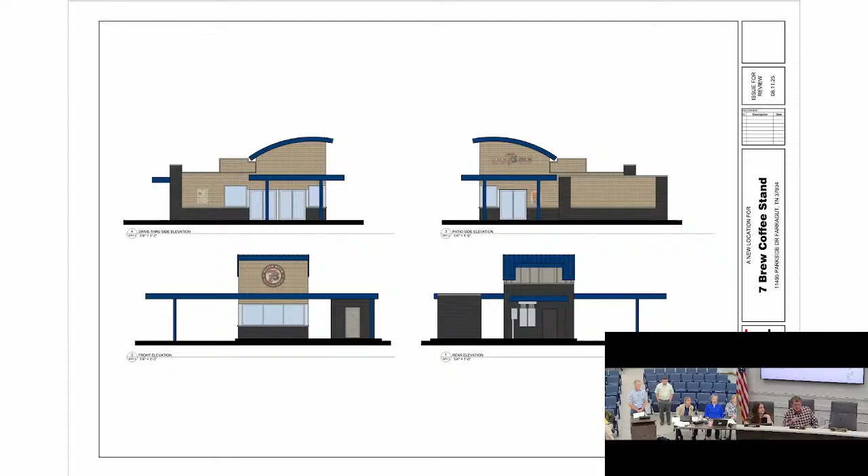Is that the sloping side, the rear elevation? Yeah, that's true. So you're really not gonna see - all you're really seeing is the fascia of the blue from any public right-of-way. And I do think that their sample, as long as we hold your feet to the fire on your sample and you stay true to it, is a lot more muted than this kind of vibrant blue that's being shown in the elevations. So anyway, for whatever that's worth, I'm okay with the blue.

I do have a question. Let's go back to your mechanicals. I see you have a walk-in cooler, which is somewhat screened with some compatible veneer, it looks like. And then you got some mechanicals on the roof. Of course, it's a small building. I mean, I guess you have another walk-in on the inside?

No sir, they're all reach-ins on the inside. Yes sir. And then obviously you got some HVACs - you probably only have one condenser sitting up there on the roof. That's correct. And so is that what we're looking at, some screening up there? Okay. Yes sir. And then my final question is, where's the closest bike rack to this particular shopping center?

It probably has a bike rack over there near the PGA Superstore, and I'm not seeing a new bike rack, but I do think that this would be an area that folks would ride their bike to and unhook, sit outside at one of your tables, enjoy your coffee. Yeah, we'd be happy to add a bike rack. The only thing is there's not a true walk-up service here, it is a pure drive-through service. But if somebody wants to come and sit outside, we'd be happy to put a bike rack in.

That's not a problem. Okay, this leads me to a different question then. In some of the renderings, I saw some outdoor kind of picnic-style tables. What would be - if you don't have walk-up service, why would you have those? That's an employee break area that they go outside and sit down. Okay, do you have a dumpster enclosure? Yes.

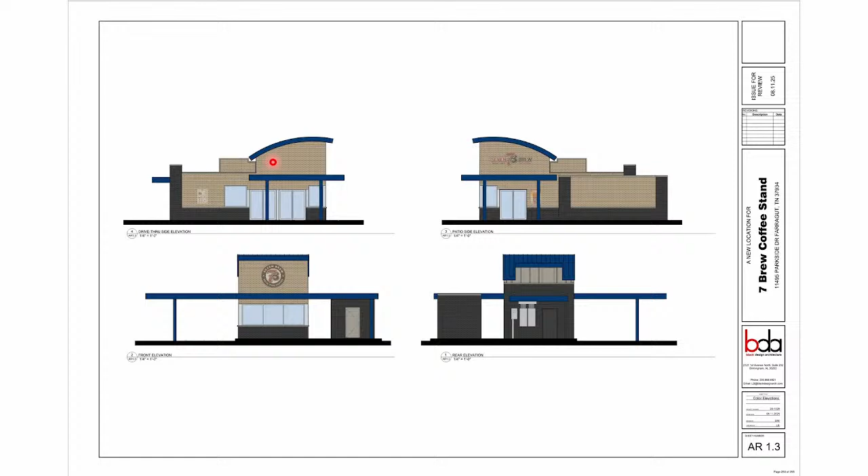Is that a barn door type arrangement? Let me check. It was in the packet, I know, but it'll have a bricked enclosure to match the brick on the building. It does have two swinging doors, I can see it on the plan. It's got barn doors, okay.

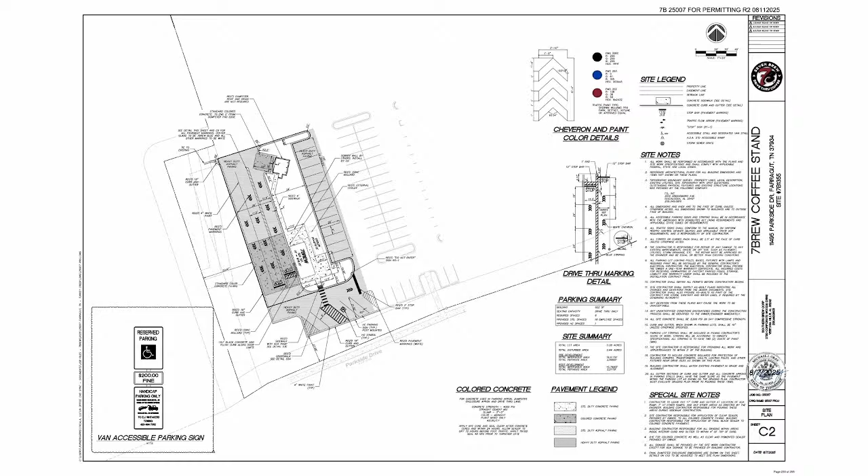Yeah, I'm going to retract my comment about the bike rack. If you don't have walk-up service, the odds of your employees riding bikes are slim, not unheard of, but probably not. They're probably going to want their vehicle there, and if they show up in the sun and leave in the rain, they won't want to be on a bike. So I'm not as concerned about the bike rack. But I can't think of the last time in town we had something purely drive-through only without walk-in service. Maybe 30 years ago, maybe a Checkers was the last time. So it's a little atypical.

I do think it's a good use, and I like that you're creating less impervious surface than what's there today. That's always a good thing. So if everybody else is on board with the blue, we appreciate your attempts to address our wishes for brick, or at least masonry veneers, and we think you've done a good job with that.

It's a modular building, so I hope the structure can handle it. It looks like you used thin brick instead of full-size brick. That's correct, that makes it a little easier. It's a true prefabricated building, so it has state seals from the factory, state of Tennessee inspected. They bring it in and drop it on our foundation. It's put together in about 2 days, already stamped and ready to go. Kind of like that restroom we got behind the town hall here.

With it being that color of blue, over time that's going to fade. Other locations? No sir, we have not seen that. We have about 30 of these locations, so to your point about the blue, it's too expensive to change color, so we've been consistent all the way around. Well, it kind of matches the chairs we have in here. I think we're fine.

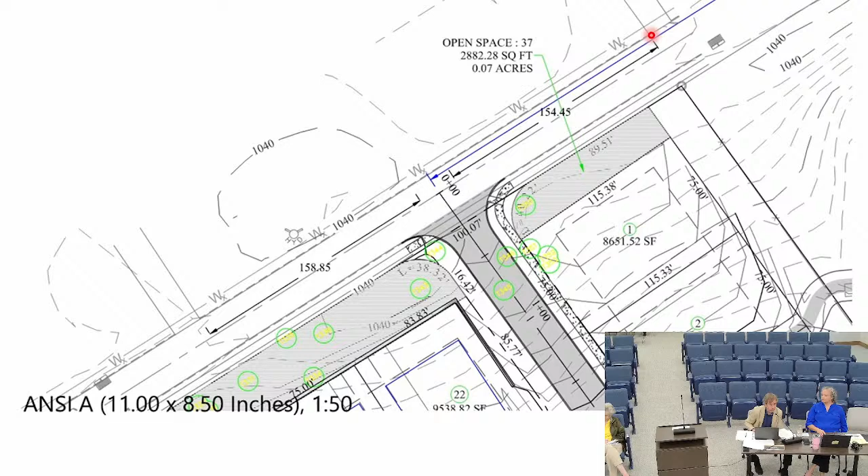Here's another example on Heron Road. Somebody was building a house. They had to move the access a little bit to have better sight distance, but it didn't meet the 200-foot distance requirement for a minor collector street, so that variance had to go through the Planning Commission and the Board. Turkey Creek Road, this guy was adding an access for his dock, and again, it was a no-brainer, but the process was kind of long for what he was requesting.

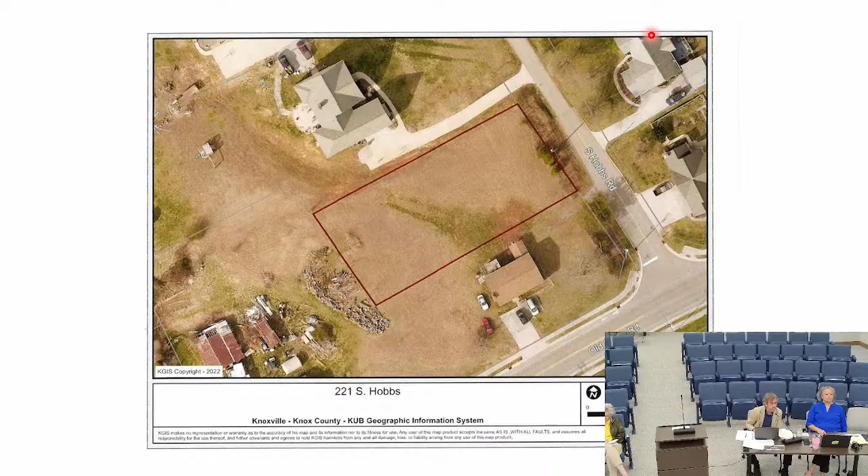South Hobbs Road was another one. There was building a new house, and there was no way to physically get a driveway that would meet the 200-foot distance requirement, so they had to get a variance from that and go through both the planning commission and the board.

So again, looking at our approval process and trying to figure out, does this make sense? Is this necessary? Are there ways to simplify it and streamline it for the applicant and for the people that have to review and approve these, and giving the town engineer more flexibility to look at some of these things. And if he has a concern, he can bring it to the planning commission. But that's some of the overriding goals of what we were trying to do with this update to this particular ordinance. If y'all have any questions or anything specifically you want me to address, I'd be happy to go over that, because there's a lot of stuff being taken out and added.

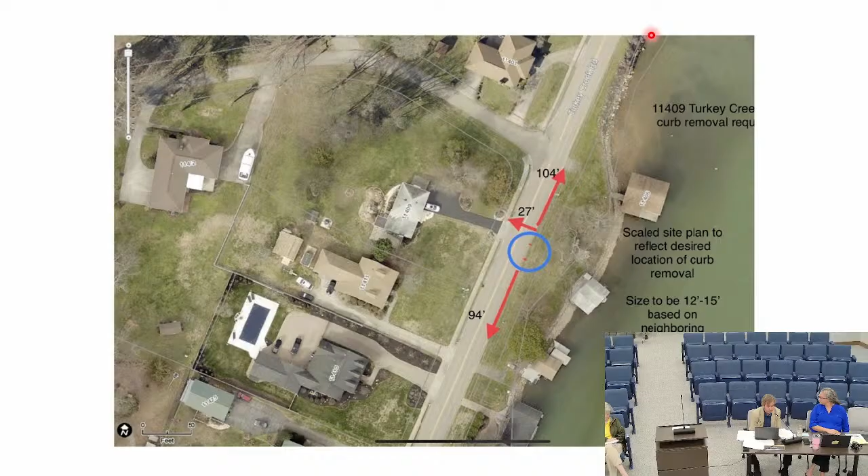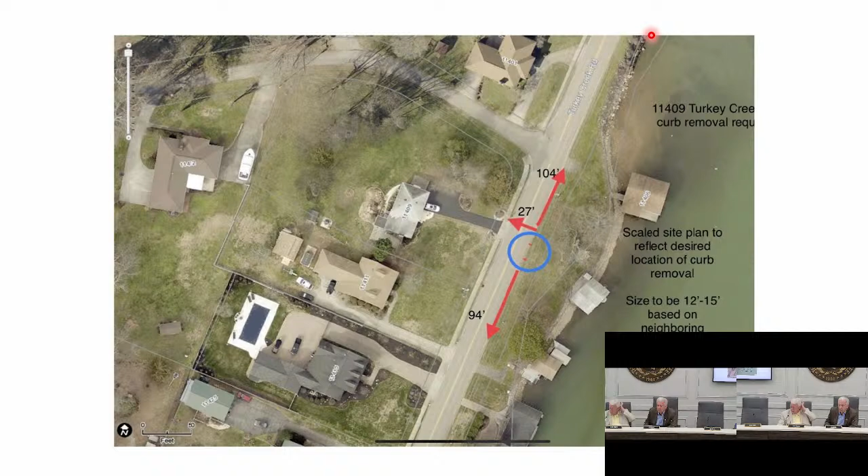Commissioners, any comments? No, I don't have any comment. I think, Mark, you've done a great job on this. A lot to read, a lot to try to go back and look at. So I know you spent a lot of time on it, and it shows. Anybody else? Thank you, Mark. Appreciate it.

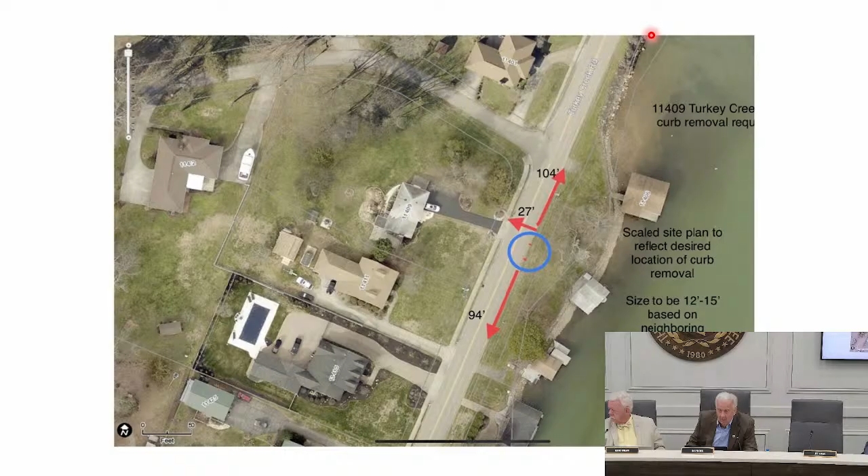Yeah, I'll try to have this in an ordinance hopefully next month. Thank you. All right, next item number 6 is anything under utilities, Mark?

No, sir. And then citizens forum, any? Yes, I do have one citizen that signed up to speak, Greg Wyberly.

Job before you, right? Evening, Mr. Mayor, nice to see you again. You too, glad you're here again. I like to be involved. I just wanted to follow up. We need your name and address, please. Oh, excuse me, 12603 Evans Road, Greg Wyberly.

I just wanted to follow up a little bit on our conversation last week. Some people are getting fed up with all the social media stuff, which is why I try to present to the town the facts as I see them, documented. I've done that before with engineering reports. For those of you that do not know me, this applies to the Evans Road Improvement Project. So tonight it's on this TDOT document on multimodal access policy. And in this document, it provides for exceptions to the way the town can go about deciding what to do on properties. One of those exceptions is the use of prudence, which is the ability to discern the right course of action in a given situation.